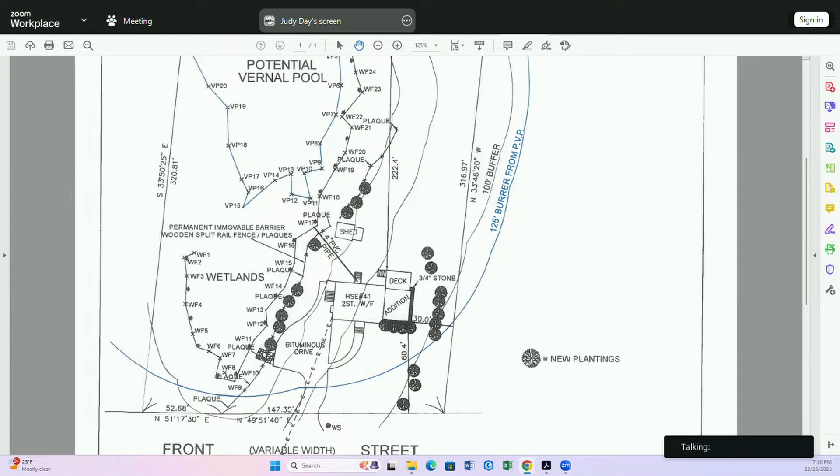All right, next up we have 10 Exchange Street restoration plan discussion. Judy, can you run through this one for us?

Sure, through the chair. The commission issued an enforcement order on November 4th after reviewing the wetland delineation provided by the applicant and confirmed by Joe. This new enforcement order required the homeowners to submit a restoration plan and an invasive species management plan by November 26th to be discussed today. So those timelines were met.

I don't think we have comments from Joe yet, unless he has some informal feedback. But I think at this point, if not today, at a future meeting, we'd be looking for the commission to confirm that they're satisfied with the restoration plan and the invasive species management plan, and get the homeowners in a position to start work this spring, ideally. Additionally, if the commission wants to specify a survival rate, measure of success for the plantings, or any monitoring requirements, those are things we can also talk about. Okay, great.

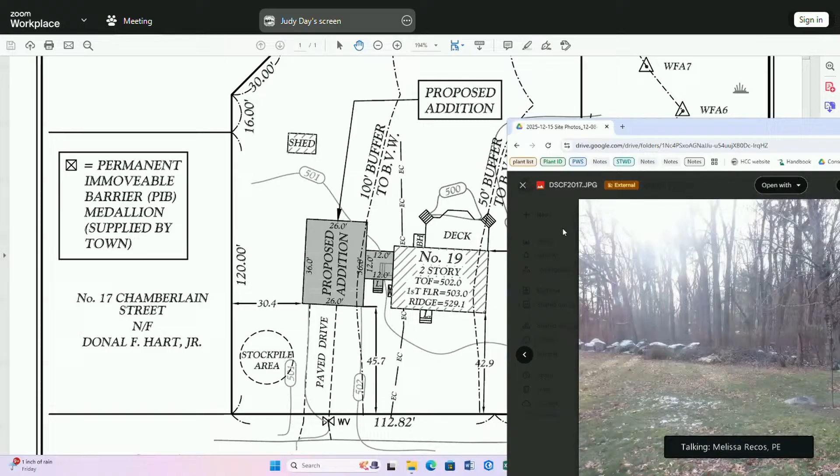Okay, do you mind going back to the plan? Jump back, see if the stone wall's on there. Yeah, the stone wall's not on there.

That's not shown. All right, so we're talking about PIB medallions supplied by the town. Christine, can you talk for a minute about the PIB that's being proposed, what that's going to look like and kind of how it lands on the property?

We were going to use the medallions that you were going to provide with stakes, and wherever you want them, we'll put them. If where they're delineated right now is not acceptable, we can move them wherever you want us to.

Okay, where they're delineated now, is there any rhyme or reason for their positioning? Are they like along the limit of the lawn? I think it was just out of the buffer zone and along, 25 feet out.

I think it would make sense to put those along that stone wall tree line area where the limit of the grass is right now, because if they hang out in the middle of the lawn, it's going to be confusing, unless there's a major restoration effort, and I just don't think that's warranted for this project.

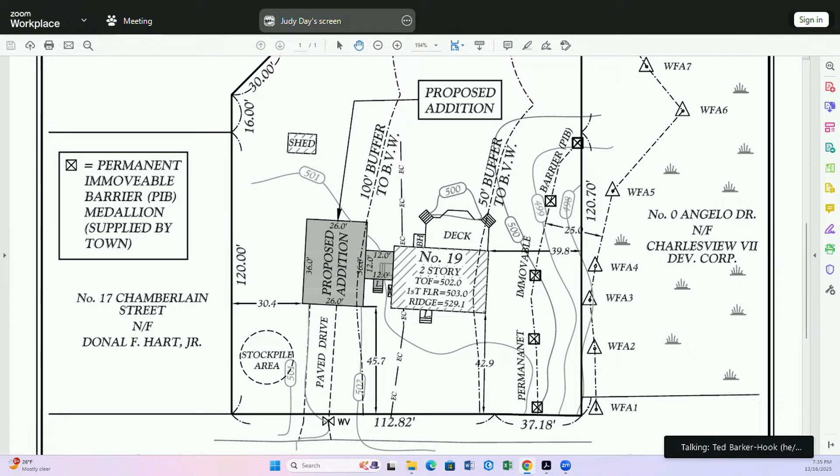I only wonder about the existence that Joe points out of the vernal pool, and whether that should change some of our thinking, assuming this plan is north-south normally, up along the northern side. If there is a vernal pool right near WFA 6, I wonder if that should change a little bit our thinking for PIBs up that far.

I thought it was on the west side, not the east side. I may have misunderstood. Maybe Joe, can you explain the vernal pool to us again? Yeah, the vernal pool is on the east side, and within the delineated pond there's an intermittent stream, a little bit over 200 feet to the west.

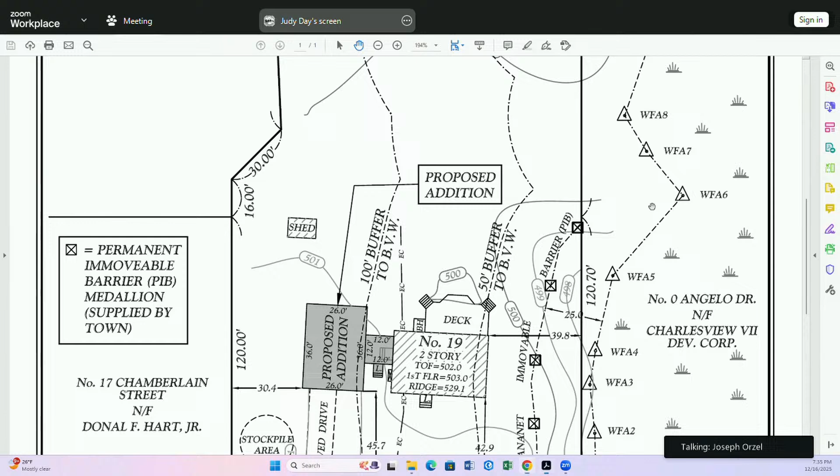Okay, assuming the plan up is north. So maybe Ted, if we continue the PIB along the property line and that stone wall all the way to the north.

Generally I'd say okay with the stone wall, but not knowing where it is in relation to the lines we see on the plan, it's hard for me to say immediately yes, follows the line, because I can't tell from the photos.

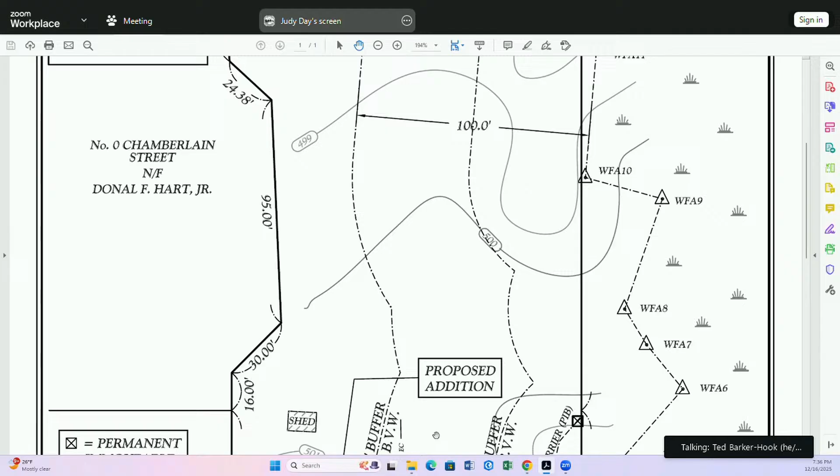I think if there were no vernal pool, I would say great, follow the stone wall. The vernal pool is the only thing that gives me hesitation, and I don't know where the stone wall is on the plans. I mean, if the stone wall comes within 15 feet of the vernal pool, I think that's a bad place for a PIB.

Through you, Melissa, I got a question for Joe. Isn't the stone wall we're talking about along the entire western boundary of the property, up by the shed? You got the shed, and then it looks like that's the same stone wall you're talking about, it would be behind the addition all the way up the western side.

Through the chair, I think there's stone walls on both sides. Yeah, I think so. Yeah, one in the front.

Okay, Matt, my suggestion would be either along the stone wall or the larger diameter trees on the western property line, whichever is more upland side. Right, so there's a clearly defined lawn on that side of the home, and then you either hit the trees or the stone wall first.

It's tough to tell looking at the pictures and the street view. I think whatever's closest to the house is where the PIBs want to be, whether that's the stone wall or the trees. It looks like the trees. No, I think that makes sense.

I hear you, Ted, about the vernal pool, but I think that even if the vernal pool is identified on the plan, I don't know that it would, for me anyway, change my feelings on this being an RDA, just because it is lawn and it's a very clear line of that wall. I just don't see critters using the backyard, getting over that barrier of the wall that exists right now.

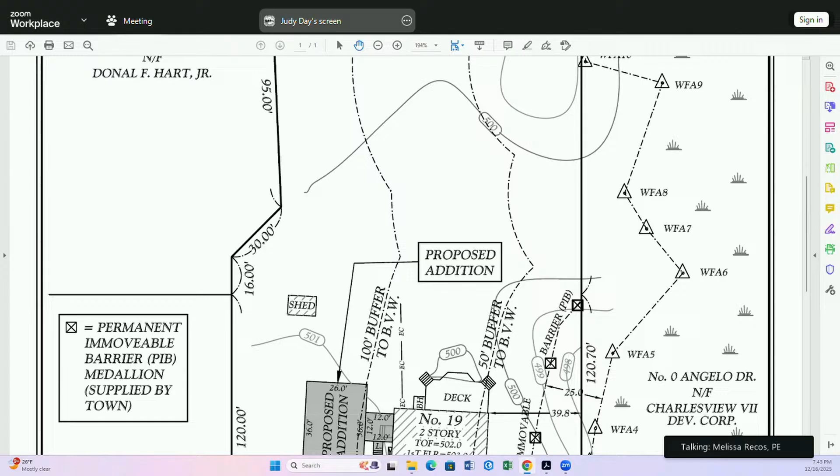All right, next up we have 100 Ash Street. This is another new hearing. So if Ted, you could open this for us, that would be great.

I'm ready. The Hopkinton Conservation Commission will hold a public hearing on Tuesday, December 16th, 2025 at 7 p.m. virtually online to hear all persons interested in a request for determination of applicability filed by Oleg Gorelek for construction of a patio and walkway, completion of a detached garage, and after the fact approval of a shed with associated site work. Location 100 Ash Street, Assessor's Map U22, Block 60, Lot 0. Thanks, Ted.

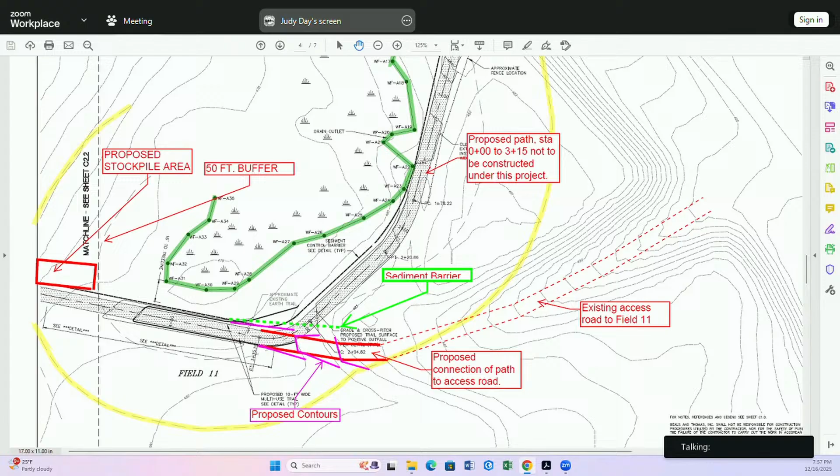All right, next up we have 15 Montana Road. It's a notice of intent continuation for after the fact work. I think we opened this and continued it right away last time, so this is the first time we're seeing anything on this property, other than what we read in the file, obviously.

So, Judy, can you give us the background on this? Sure. Through the chair. So the homeowner at 15 Montana has filed an NOI for after the fact work in conservation jurisdiction. This was originally noted by DEP during their review of the notice of intent for 12 Maple Street extension, which is located approximately here to the east. As they noted, some work done on the neighboring property that didn't appear to have been permitted. So the work encompassed by the application is this paddock here.

There's a barn and a coop structure. I think there are some questions about how far the delineation extended, but I guess just as an overview, that's what the applicant is seeking, is after the fact approval with flagging done around BVW on this side of the property line. And I think there's questions about how far it extends. So I think as a high level, that's all I have, but happy to provide any other details.

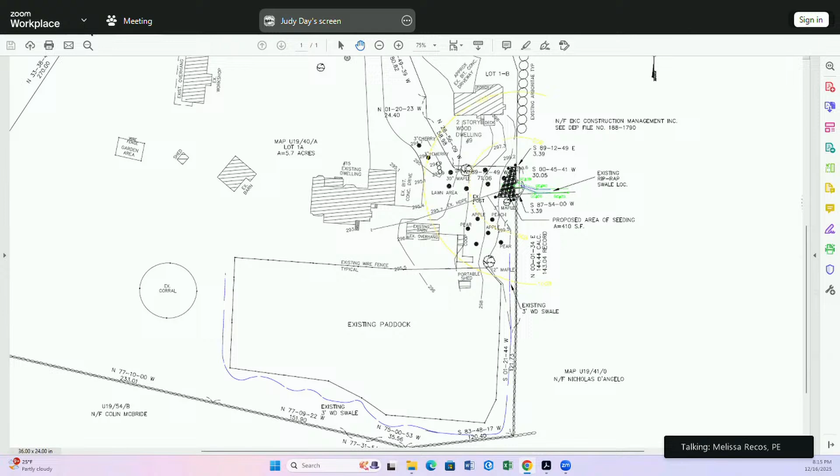Thank you, thank you. Next up, we have 10 Clinton Street, notice of intent continuation for a septic replacement.

All right, Judy, what do we have here? So at the last hearing this was discussed, there was no DEP number issued yet. That has since been issued with no comments from DEP. A few of Joe's outstanding comments were a grass clipping pile that he saw around wetland flag 4 and between 2 and 3. So we have confirmed that those grass clippings have been removed.

The applicant added more information about the plantings. There are 2 ornamental shrubs within the limit of work that they're going to try to transplant elsewhere and keep. In case those don't make it, they've proposed 2 additional high bush blueberries to be planted. No location specified yet, but the idea is to save those shrubs and add supplemental plantings.

They added a note that the new proposed patio will be the same size as the existing patio, which has to be moved to make room for the septic system.

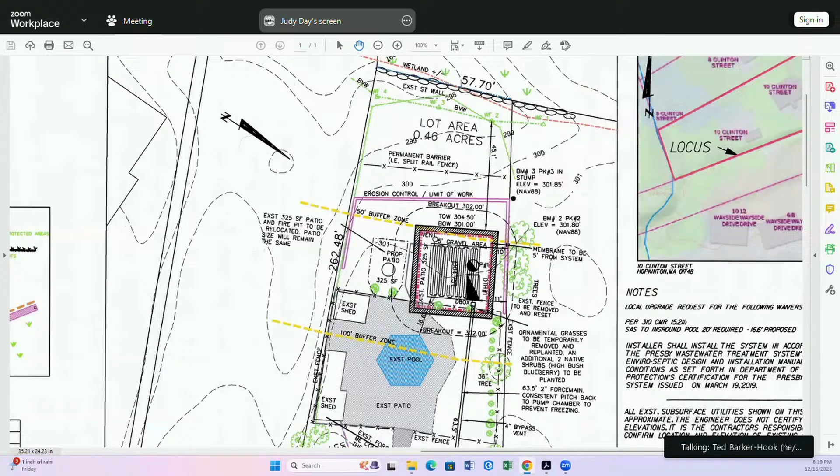Thank you. Good luck with the project. It's nice to get a round of applause after a vote. I think we ought to have that more often. You want us to do it again? Thank you, good luck.

Next up, we have 33 West Elm Street, notice of intent continuation for a sewer connection. We went over this one in our last meeting. Judy, can you point out the updates?

Would you like me to take a stab at it? Go ahead, Joe. Joe Marquedant here. Since we met last, we've added info to this plan in response to feedback from Judy and Joe Orzel. The chief issue was the buffer zones and different resource areas, so we converted the site plan from an assumed base to the elevation base that matches the federal flood hazard maps.

We did micro topo in the backyard and established the limit of the flood zone AE, the 385.50 elevation, shown in red on the right-hand edge of this plan within the area of hydric soils. That's also the limit of the bordering land subject to flooding. The 50 and the 100-foot buffers from that run generally with the 100-foot buffer from the BVW edge, shown in green here. So our limits of the jurisdictional areas are very similar.

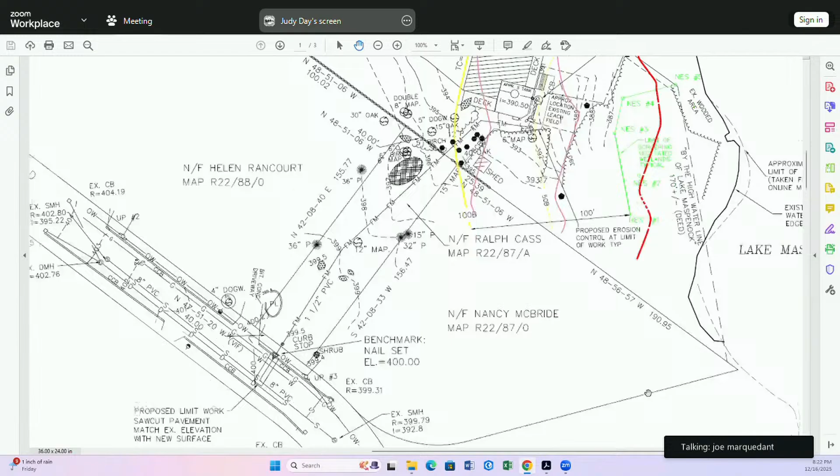When we left last time, we were discussing 1 tree and its replacement. I believe the conversation now should revolve around 6 trees lost and what will be added in their place. So we developed a planting plan combining trees and shrubs equaling 12 — 2 to 1 for what was lost. Some white pine, white oak, northern red oak, dogwood, serviceberry, and low bush blueberry sprinkled in that area against the tree line, against the buffer zone.

Some fall inside the buffer, some fall outside. We were trying to space them for maximum success with regard to growing, in the general area of what was lost. That's the major change from the items we ticked off last time — this unforeseen tree clearing.

Okay, that's unfortunate. All right, then.

Joe Orzel, did you have a chance to look at this, the planting schedule and whatnot? I did, and the plants all look appropriate. I know Joe had mentioned that some of the plants were proposed outside the buffer zone. That was one of my comments for the commission to discuss. I don't know if there would be other locations within the buffer zone where they might be able to fit a couple of those in.

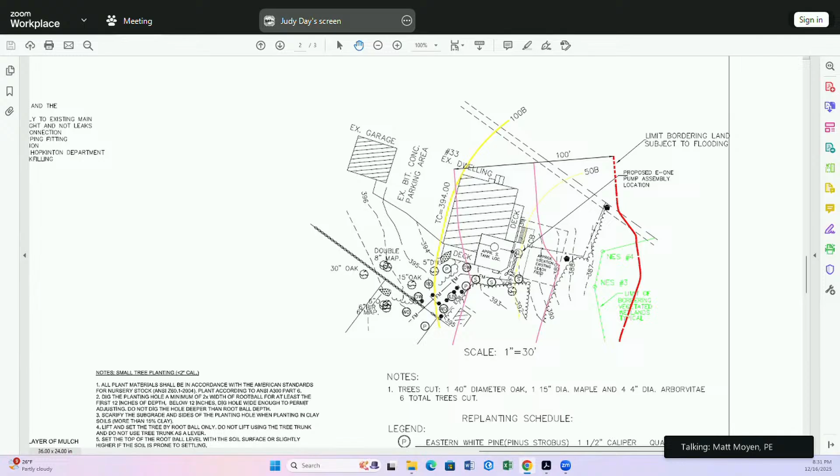Through the chair, Judy, can you scroll down a little bit to the planting list? I see... okay, so there's some shrubs mixed in there. So, Joe, your sense is we could maybe plant a tree and some shrubs within that footpath and not prohibit its use? I would agree with that, yes.

So how does this sound for a condition? For the special condition, conditioning the approval with the understanding that a combination of trees and shrubs, 6 will be planted within the 50-foot buffer and the other 6 will be planted within the 100-foot buffer. I think that works. Does that work, Melissa? Works for me, yeah.

Through the chair, yes Joe. I did have a comment regarding the serviceberry that's proposed, the Amelanchier. The species is not provided in the plant list. While most of those, or many of those, are native, there are some that are not native. So I just want to make sure that a native Amelanchier is utilized. Okay, thank you.

Would you like me to attempt a motion here? Yes. All right, I will make a motion to issue an order of conditions with 2 special conditions. The first being that the Amelanchier species be selected from the list of plantings that the commission has. The second being that 6 of the proposed plantings, trees and or shrubs, will be placed within the 50-foot buffer, and the other 6 will be placed within the 100-foot buffer.

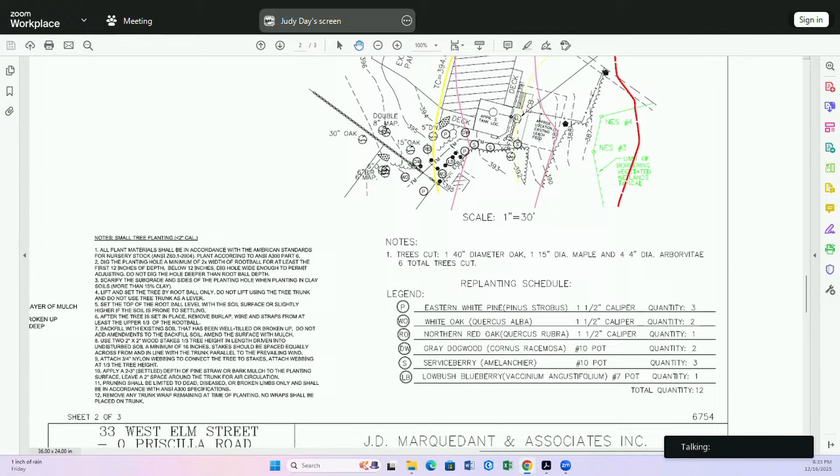All right, next up we have 12 North Mill Street. This is a continuation, single-family house. I see Mr. Petrosi's on the line. Hi there. Hello, how are you? Good.

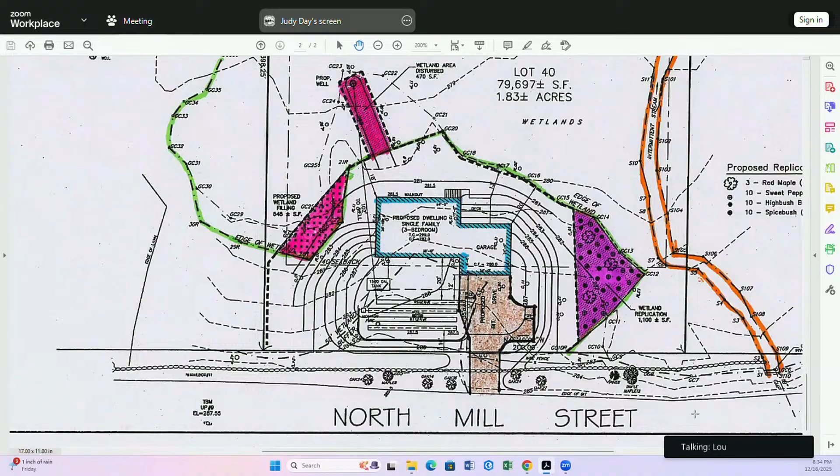So since we last met, we did a couple of revisions to the plan. First of all, we went out there and we located the substantial trees, 10 inches in diameter or greater. We provided an existing condition sheet showing the trees located. We also reconfigured the house to move it a little bit further away from the edge of wetlands, where we try to take more advantage of the variance that was given to us. So the garage area is now pushed forward to the 30-foot setback that was given to us, or granted to us, by the zoning board.

And then we also created a wetland replication area. I think the commission was a little bit concerned that not providing any replication wouldn't be compliant with the wetland regulations. So we have a wetland replication area that's a little bit over 1-to-1 of the area that's being proposed for filling. And that's pretty much it since we last met. And I will be meeting with the Board of Health to request a waiver from their regulations regarding the location of the well within closer than 50 feet from the wetlands.

So that's pretty much all I have to report. And I think we've kind of maximized this area. We were only using, out of a 79,000 square foot plus or minus lot, we're only using about 18,000 square feet of it in the front portion of the lot. Okay.

All right, thanks for that summary update. So you said you added on the existing conditions plan trees greater than 10 inches. Yes. Okay.

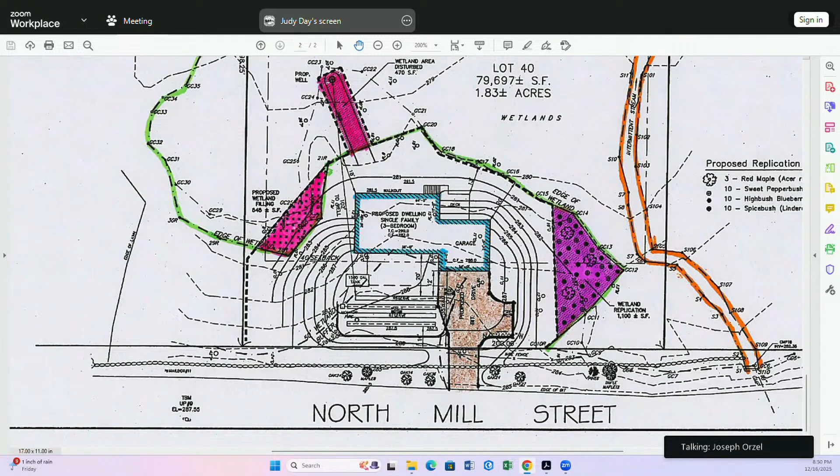Yeah, I'm just doing some... Through the chair. Yes, Joe. Yeah, no, that was a good question. I'm just looking at that on the existing conditions plan where it shows a little more clearly where the 50-foot is located. It actually looks like the 50-foot buffer on the western edge may actually still be from the original wetland line and not the revised wetland line.

Yeah, I see what you're saying. That should just be clarified, I think. I can have them darken it up. I can have them put another... these colors are my colors, the crayon. So I can put another color on there and sort of amplify it a bit for you. But I'm pretty sure that how this is laid out is to comply with the 50-foot distance on both sides.

Yeah, so this plan definitely makes it easier to see, and I could see it on the other plan. So what it looks like to me is from flags GC 16 to 18, that distance to the 50-foot buffer is 50 feet. Where you have flags GC 26, 27, 28, it's clearly a shorter distance. So it seems like that 50-foot would be from the new edge of wetland, and that's what I was trying to figure out. This plan makes it easier to see and figure out.

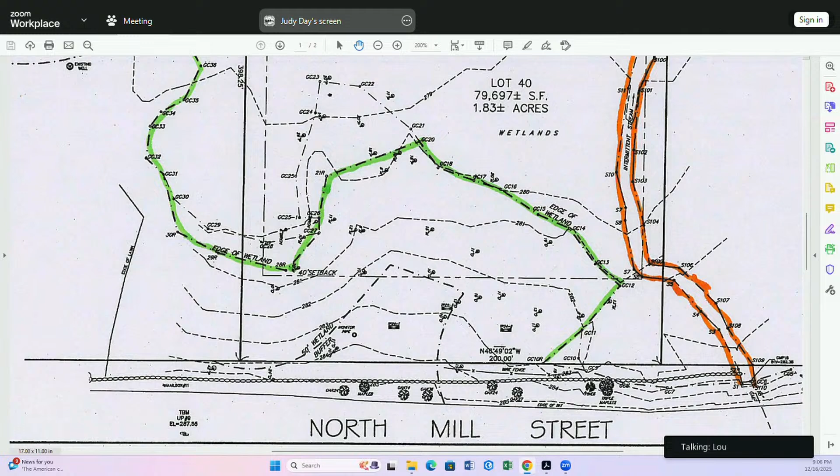All right, that wraps up our continued hearings. So we're going to jump back down to work session. We are up to the Legacy Farms Road project change request.

Good evening, this is Mark Arnold with Goddard Consulting here on behalf of Legacy Farms LLC for this change request. Glad to give the commission an introduction unless Judy or Joe would like to - nope, go ahead. Great, so if you don't mind I'm just going to share my screen, if I could just get that request. I'm just going to share basically the letter we submitted, which has some tables helpful to understand the matter, as well as some photographs in the plan.

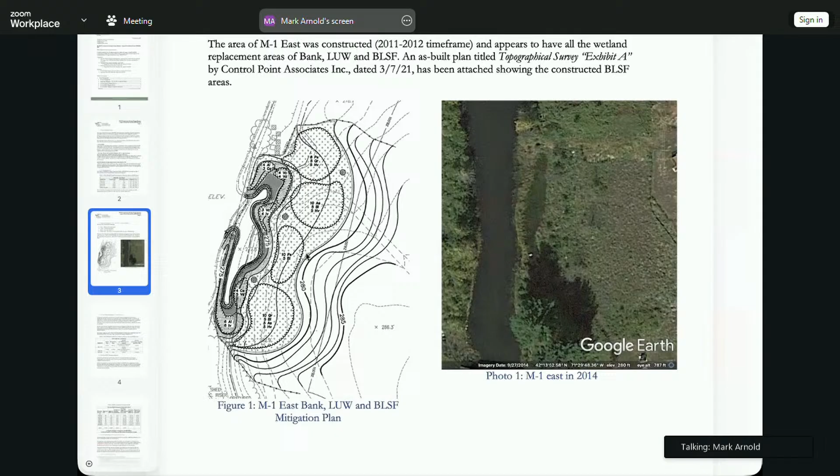Just to recap for the commission, this mitigation area was built back in 2011-2012. VHB was on site, they did some reports, and it's unclear if they were even watching carefully the volume of the BLSF being mitigated. On the left side of the screen here is the approved grading plan and planting plan for the BLSF area. You can see how flat this area is along this lower section up to this contour here, which is your floodplain contour, and you can see this contour is actually pushing out to near the 100-foot buffer zone from the original bank of the pond.

So it was supposed to flatten out quite a bit from the pond and then slope up from there in the back. The bank restoration and land under water bodies had this kind of eccentric pond extension, like a lagoon, that was going to be there with wildlife habitat features and all of that. So in terms of what was built, we have basically two conditions.

One is we went out to the site, and if you look at it from a year and a half ago, it looked basically like what was supposed to be there — there was a lagoon area and kind of a wetland area, and then it transitioned to upland. This year, if you go out there, you'll find the whole area underwater. The water has gone up about a foot or so because the beavers have actually dammed up the lower reaches of the wetland.

So this table I did in two different ways, just so the commission understands there are kind of weird conditions going on where we have conditions that are artificial by the beavers. Either way, basically we comply with what's supposed to be there, close to that. In terms of if you don't have the beaver activity, the bank restoration is a little bit under what it's supposed to be. If you have the beaver activity, it's there. So that's basically right on par in terms of what was supposed to be there.

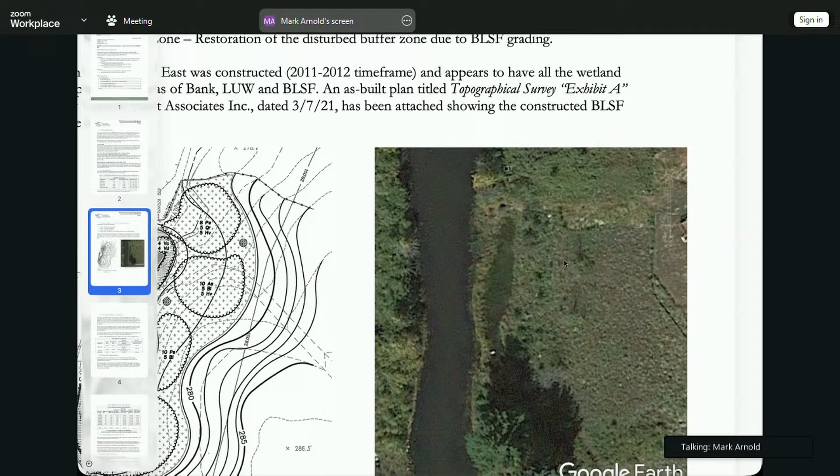So in terms of the conditions in this area, basically going back to here, we have a very well-established vegetated slope upgradient of the BVW around this lagoon with nice maturing white pines and other native shrubs in the understory. We've managed the invasives in this whole area, so it's coming along really nicely in terms of naturally establishing itself.

Because of that, we wanted to bring the commission an inquiry and request, which was if we could only mitigate this area here to comply with the Wetlands Protection Act and the bylaw, and still have a net volume of mitigation. We'd meet the minimum requirements, just mitigating at lower elevations rather than higher elevations. If we could do that, it results in less disturbance to close out this mitigation item as a whole.

We also looked at whether there's a place we could do this where we can minimize disturbance to mature vegetation, trees, shrubs, and native areas. What we've come up with is actually an area right along that crossing. If you've been on Legacy Farm South, right near the crossing, there's this nice gravel parking area, about 3 car spaces, with access to the walking trails. The area outside of this parking area, just below it, is actually dropping into the floodplain itself, and it's fairly open.

These are some photos we had taken when we were installing the habitat features in the area, just to show you that this is mostly herbaceous, overgrown meadow area. It was part of the nursery area, so it was pretty heavily disturbed. The edges have filled in and grown up a little bit, but most of this area is a trail junction and an open area.

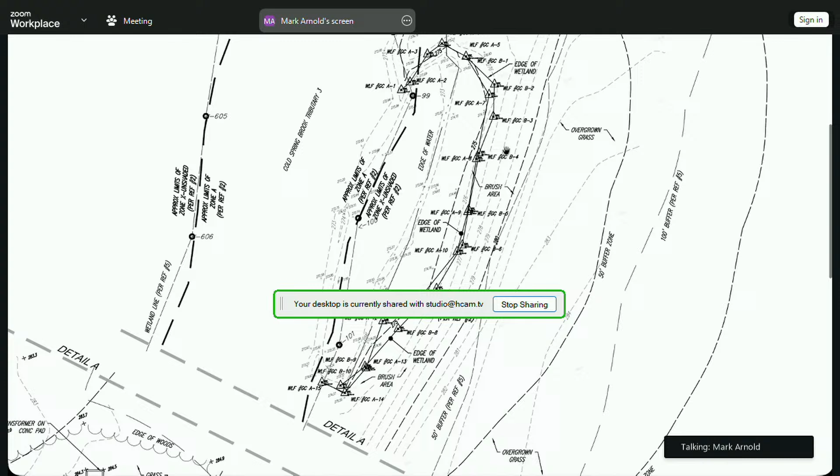Because we made this nice flat area here, this is basically wetlands if the pond isn't flooded out. It's actually really nice speckled alder and stuff like that, used to heavy flooding in that area. Then this is that slope here, which has the white pines and other native herbaceous and woody vegetation, with a lot of blackberry in this area here.

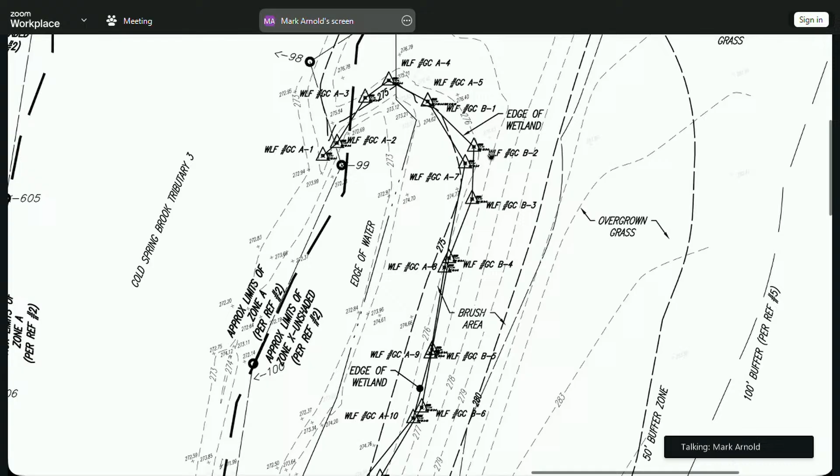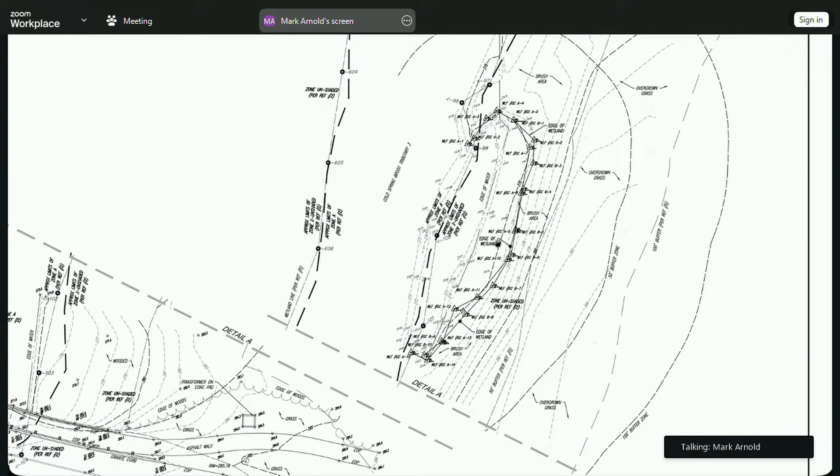So basically you can see on this plan here, these contours are very tight to each other, and this is where these contours were supposed to be pulled back farther into this hillside. So rather than going back to this same location and opening up this whole hillside to pull the contours back to mitigate where the mitigation was supposed to be built, we'd like to basically go on the other side of the road into this area where we've got this.

Here's the parking area right here. Here's those larger trees which we can leave in place. Here's this trail connection path right here. And here's the existing tree line here. Basically we've got some overhanging canopy right here from trees leaning in, and a lot of meadow area right in here.

So we'd like to basically regrade this area here to provide the floodplain compensatory storage for that elevation of 278 to 278.9, to provide mitigation that would comply with the regulations to the minimal standard, while also still providing the net volume that was originally required.

So in terms of compliance, if you look at the actual order of conditions, it has your net volume of floodplain, so we are going to meet that net volume. It's just the intervals are going to be changing, because we prefer not to go back and disturb possibly 10, 15,000 square feet or more of area to regrade by the mitigation area, because it's a steep slope.

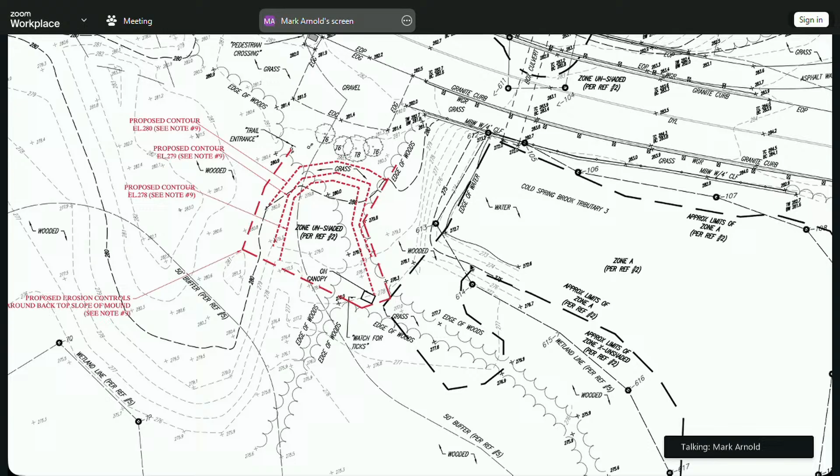We do have the buffer zones shown here, just so the commission knows. So we are in the 50-foot buffer here, but we are holding to the existing brush line in that 50-foot buffer. Otherwise, we're in the outer buffer zone in that area there. This is basically the bank of that pond there, very steep slopes. There's no change of wetland delineation there. And then we did show the old wetland lines back here, just again to show you that we're still far away from anything else that was known to be wetlands there.

Hopefully I was able to give a clear enough description. Again, this was a lot, so if there are questions from Lucas or Judy, we understand that. Any questions, glad to take them now. Okay, thank you.

I think I understand where it's going, but I'm going to turn to Joe Orzel to get his thoughts on this. Yeah, so I'm reviewing this now. I haven't completed it. I guess my first comment is...

With respect to the area that's proposed for the additional storage, I know there are some trees out there. It is shrubby, but there are some primarily box elder trees. We did go out and look at that with the site walk with Goddard Consulting, and Judy and Anna were out there on the site walk also. So there are some trees in there, but like I said, primarily box elder trees.

I'm confused by table 3. I guess that's one of my biggest questions, as far as where some of the numbers are coming from. And I know that there was some explanation there, but with respect to the last 3 columns, the as-built actual, the as-built approved, the cut, and what's required to comply—maybe some explanation on how those numbers were determined, because I'm trying to figure out the actual.

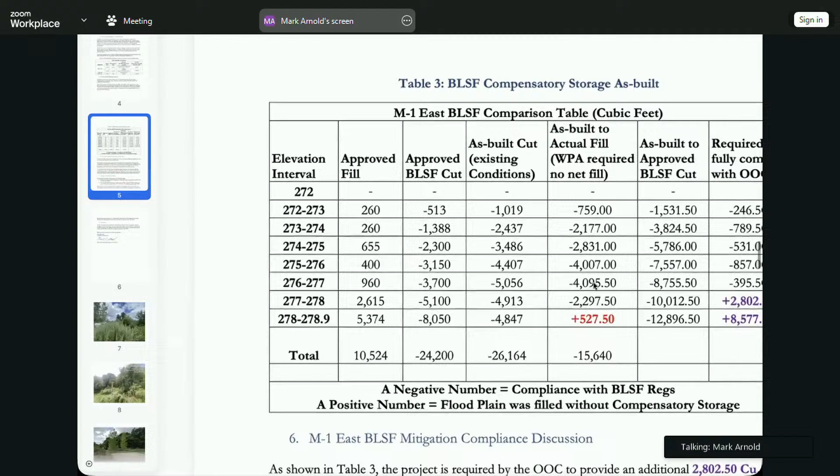Yeah, it was an interval kind of thing that we had to look at. But yeah, Joe, I understood. So I think we can definitely get you something revised tomorrow just to walk through those tables again. I'll have someone else at my office look through it to give a different balanced view. It may be just the labeling that's throwing me off. I don't know. But that would be helpful.

I think that was pretty much my questions at this point. Okay.

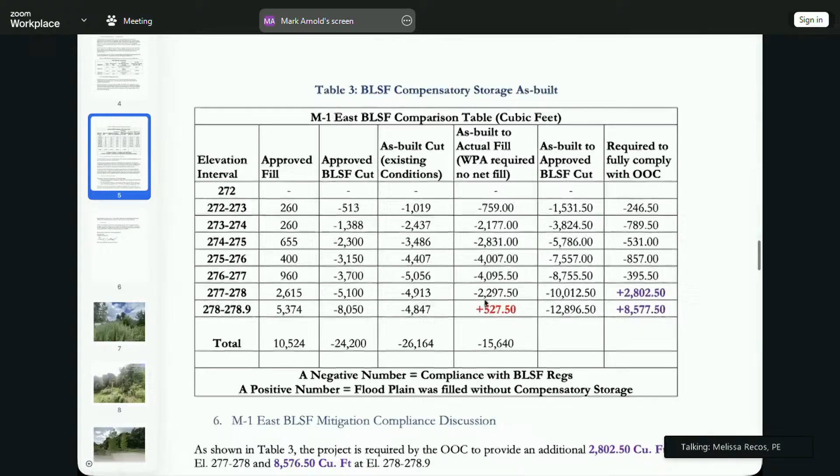I just have a quick, bigger picture question. I think what you're saying makes sense for this 527 number and kind of moving that from one area to another at the same elevation. It makes sense. But the required to fully comply with the order of conditions, because this was from so long ago, why would the order of conditions have a different number than the Wetland Protection Act? Do you know where that comes from?

So the order of conditions required more mitigation than what was minimally required by the bylaw and the act. That's something this whole project had, a lot of mitigation, because there were a lot of extenuating circumstances about this project. There were multiple crossings, old disturbance, and all these things. Also this project had larger wetland impacts originally proposed that were withdrawn and reduced when the final order of conditions was issued. My understanding from looking at the files is that this over-mitigation was actually left over from the original grand mitigation scheme designed as part of this massive site with a lot more impacts that ended up getting reduced down to small areas. I think they decided that this is one area where it's easy to just keep the mitigation without actually reducing it, to balance out what's actually occurring.

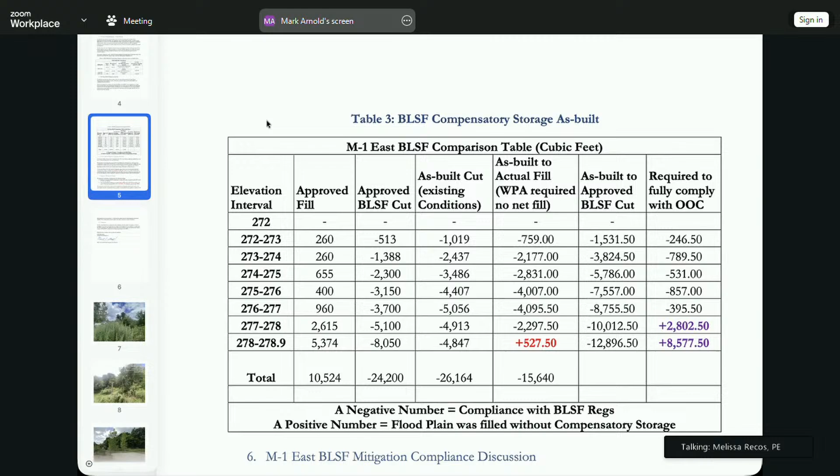I think that would be helpful to add as we're looking at this and making a decision, because I have a hard time just saying, oh, no, you don't need that condition anymore. But if there's some reasoning behind it, and like you were saying, if there are other things done in place of this that can take the place of that condition, it would probably make me feel a little bit better. But just looking at this presented the way it is right now, I feel like we're just kind of throwing to the wind what the commission wanted done back then.

So just to clarify that, Melissa, I think a little bit - basically it's these two intervals that are not in compliance with the original commission intent. That's the first thing, it's just these bottom two lines here.

That's where the discrepancy is, because you can see here that what was supposed to happen was 5,100 cubic feet of cut, but only 4,913 cubic feet were cut. So there's a loss of floodplain at that interval.

However, if you look at the interval just before that, we actually exceeded the cut at the lower interval by 1,000 cubic feet of volume. So that's why when you look at the totals, we actually have more floodplain volume, but it's at a lower elevation. But the Wetlands Protection Act doesn't say you can do that.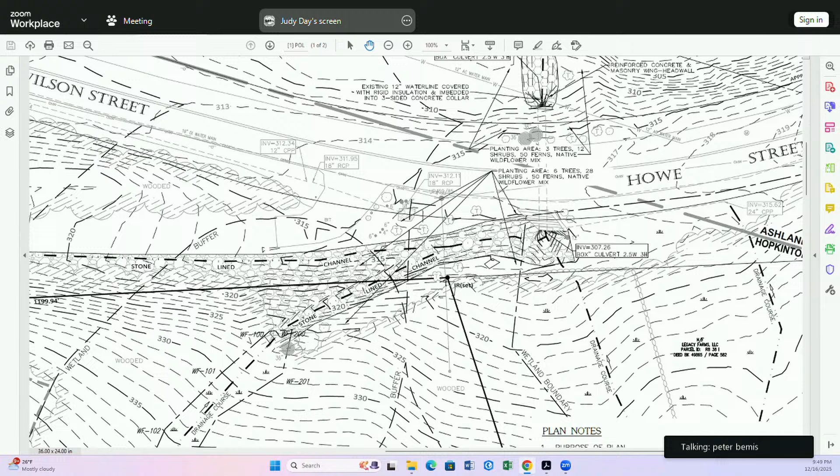Great. Thank you. Enjoy your holidays. Yes, you too. Yep. Good night. Aye.

Next up, we have Nation Whisper Way subdivision request for certificate of compliance. Hello, this is Mark Arnold again, here on behalf of the applicant. Welcome back. Thank you. So this is a request for the Whisper Way subdivision order of conditions issued back in 2019.

So this project had kind of two parts to it. One was the widening of the existing Whisper Way roadway to conform to planning board requirements for a subdivision. This resulted in a widening of the crossing and some wetland impacts.

As part of that crossing, we had wildlife culverts put in to allow wildlife movement through the crossing because there were retaining walls there. That area also had a stormwater basin, which you can see on the screen in front of you. And that work has basically all been completed in substantial compliance with the order of conditions.

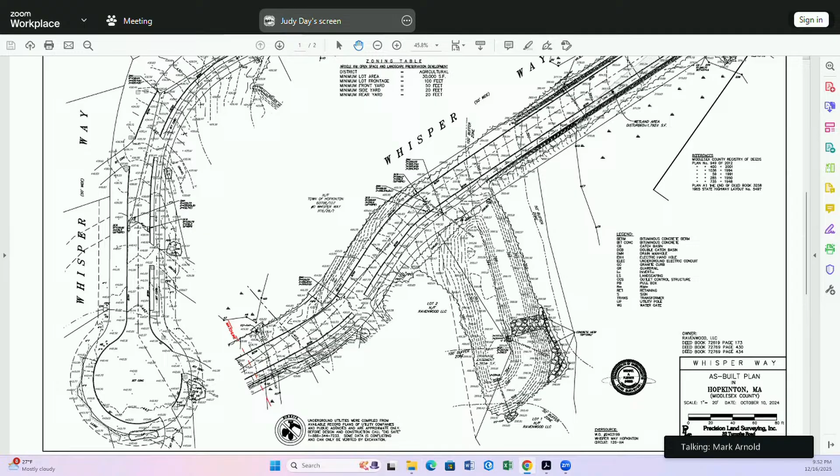If I could share my screen again, I think I'd just like to quickly walk through some of the photographs of the area. And then I think it might be best to have Joe give the commission an update on where we are in terms of his comments. There were some issues that he thought the commission should discuss, and glad to provide some more updates there.

So the first one I'm going to show is the replication area report. Just so you can see what the replication area looks like, this is from July of... this is not, sorry, wrong year. Here we go, 2025, July of this year. Here's the replication area here.

Very good establishment of herbaceous vegetation, diversity of species, vigorous vegetation. We actually found a bird's nest active in July there, which was kind of neat, kind of tucked in there. So that's been coming along well.

We did have some high mortality of plantings, but otherwise the area is established really well and healthily in terms of everything else. We do have 75% wetland vegetated coverage in the area, good hydrology, and it's definitely continuing to develop as we've gone through the years.

It's been monitored for 4 years now, so it's been quite a bit. It's hard to remember when we built it. I was there, but I don't remember the exact year. But we've been there for at least 3-4 years now, so it's definitely coming along really well.

We've been managing some minor invasive species by hand pulling, and the nations have also been very good at being proactive and going around and hand pulling when we're not even there during the months that we're not monitoring. So that's been really good to see there. So that's the replication area.

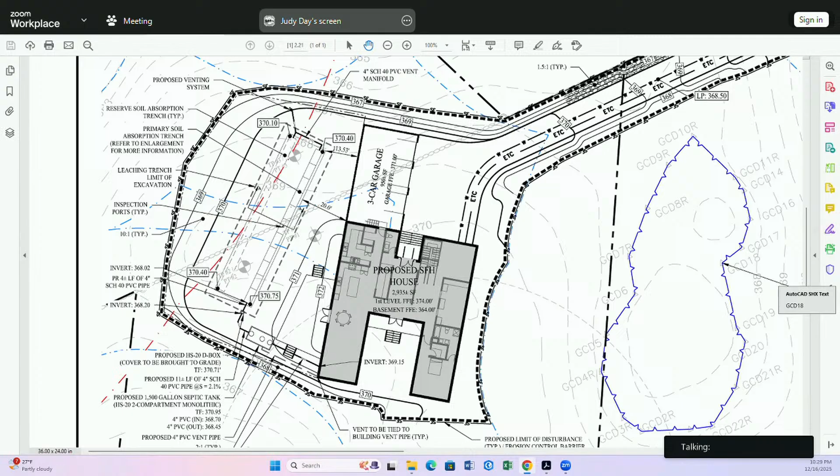Okay. Judy, do you have the sheet that shows the previously approved footprint overlaid on the proposed or revised one? I think that I do. If you don't, Judy, I can share it. Was that submitted as part of the request? I believe we did submit it — it was a red overlay. Yeah, I think I have that. Okay, that helps me understand the limits they're working within for these changes. I'm not sure if I have it. Oh, there it is.

Yeah, so the red is everything new, and we put that over the black. So as you can see, the garage shifted.

That paver area along the side I referred to, the 300 square feet, that is removed now because it's not on the red - you'd see a red overlay if that was the case. But our limits, our silt fence, our limits of disturbance around the edge, it's exactly the same as the approved. And you can see the leaching field shifted over a little, just to provide the appropriate distances from the house and the garage area.

So I know when we approved the plan, we went to extensive discussions on maintaining the limit of disturbance regardless of what comes forward with changes, and it looks like you've done that and maintained kind of the footprint area of the house where the garage is.

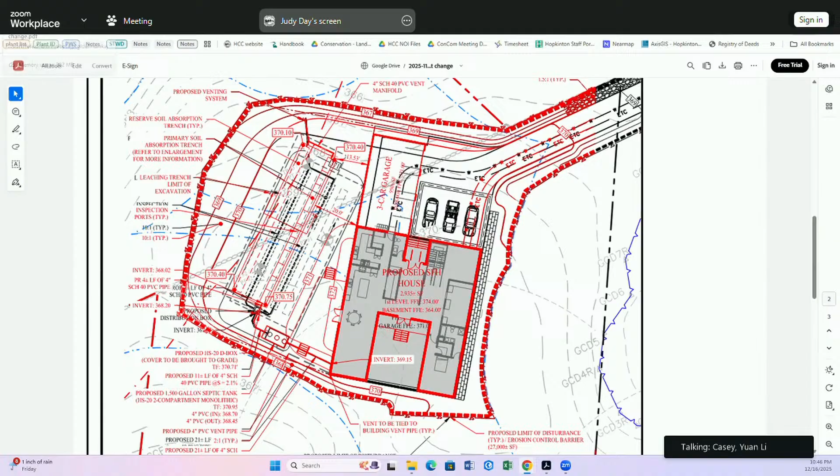Through the chair, this is Ed. I just want to publicly sing Ted's praise for catching that about a fire truck. It's totally outside of our purview and everything, and we're thinking about septic systems. Excellent call, thank you, Ted. I second that, thank you.

Melissa, could I do something super quick? It's so late, I want to go to bed too. Joe, before I lose you, I like to make sure I'm pronouncing people's names correctly. Is it Orzel or Orzel? It is Orzel. So we've been doing it right the whole time, but nobody could confirm it for me. As long as I'm reading the script, I want to make sure I'm pronouncing names right. You got it, thank you.